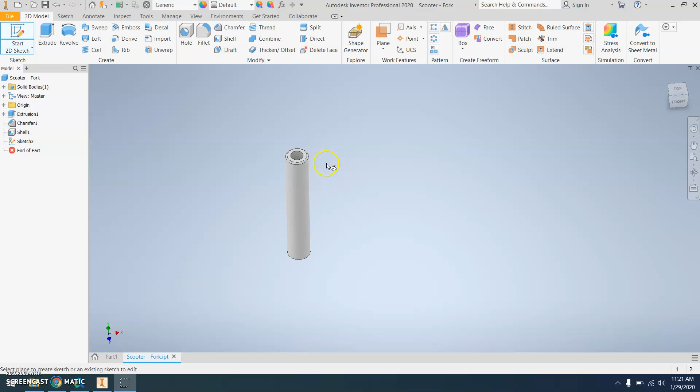In this video, I'm going to continue to model the fork. You should have the steer done from the last video. You want to do a 2D sketch on the bottom surface here.

Start with the circle tool. Select the origin and then go out by 36 millimeters.

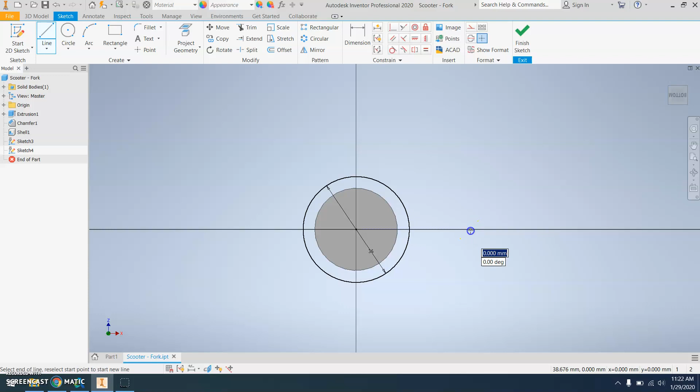You then want to draw a line out in the distance here. Doesn't matter what size because we're going to come in and dimension that line. Hit the dimension tool and you want to dimension over by 32.5.

Hit enter. You then want to dimension the size of it, which should be 25. That might cause your line to move. It's actually weird that mine didn't move.

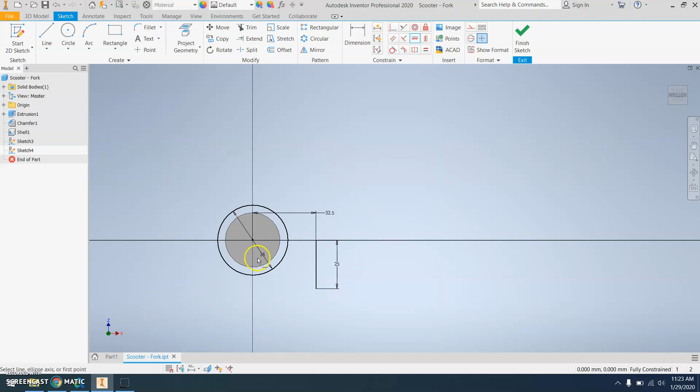You're probably going to have to use this horizontal constraint if your line moved, and click the center of the circle and then the end of that line. So yours probably will move. I do not know why mine didn't.

So then you want to use the line tool again, this time construction line, and just go down a ways. Construction line's not real. Hit escape and don't forget to deselect construction line.

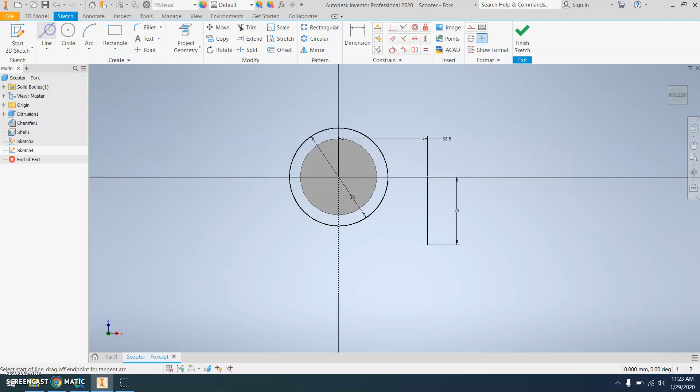You're then going to use a line to connect a tangent to this. You're going to have to go around this circle until you see the tangent symbol. Right there, locked in, and it's very small. Above the yellow dot, there's a tangent symbol with a circle and a line.

See, that's what it looks like. It's bolder now that I got it there.

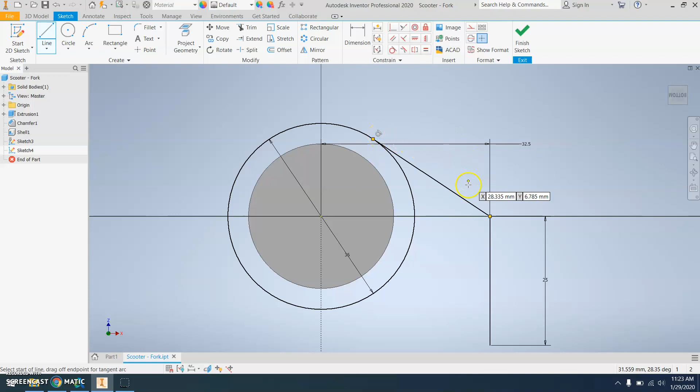And then the next thing you're going to do a line also from here on down. Doesn't matter where you snap because you need to dimension this. This is going to be 30 millimeters. All right, looks about right.

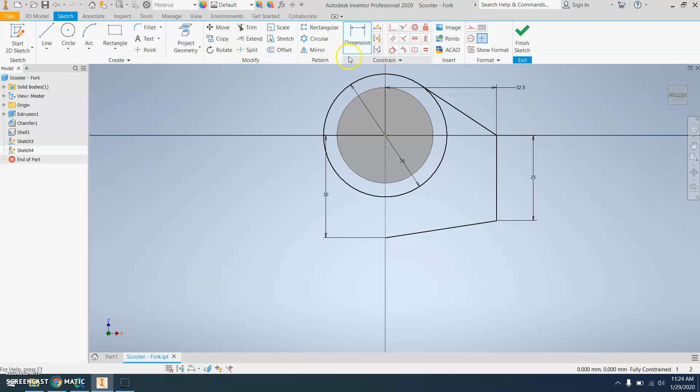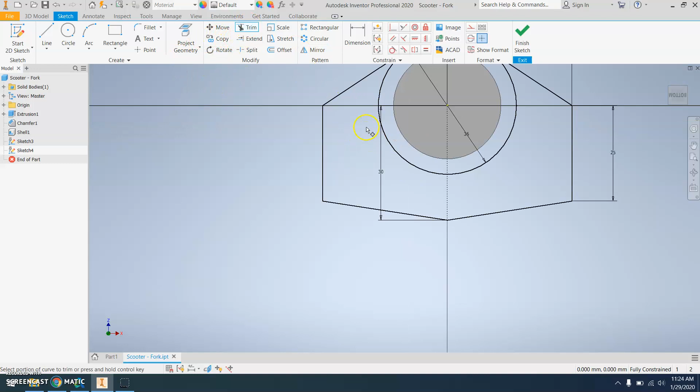And then what you're going to do next is mirror this line. So choose mirror, or these lines I should say. Choose that one, choose this one, choose this one. All those you want to mirror. Select your mirror line, which is that one. Hit apply. Boom. You're then going to go in and trim any excess on this circle.

Good, finish sketch. You're then going to extrude this thing by 7 millimeters. Hit enter. Make sure you save it. I'm going to have more parts on showing how to...